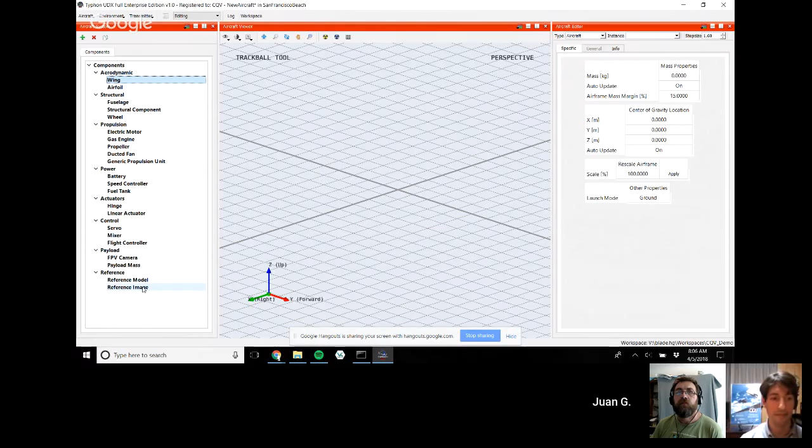So let's see how you use this interface to create a UAV design. The idea is you have a number of parametric components you can combine. For example, you have wings, airfoils, wheels, electric motors, and just a large number of components. And then you add them to your design as such.

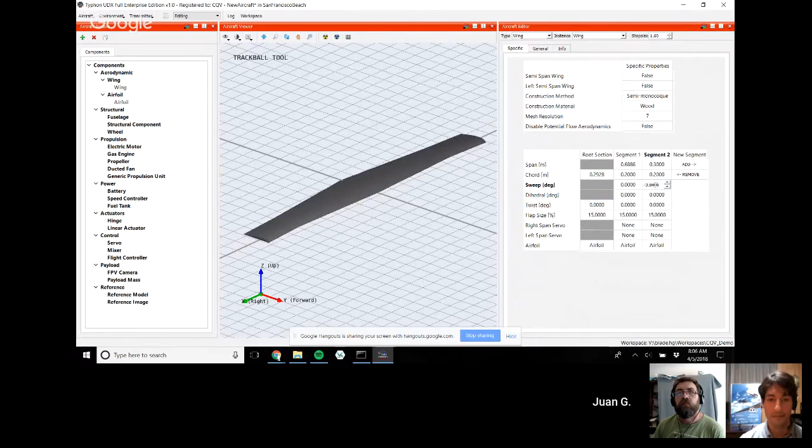Then you can go to the editor pane and edit the component. Each one is parametric, so in the editor pane you can see all the parameters that define the design for that component. For example, for the wing, you can change the chord and the span, and add multiple wing sections, allowing you to create quite complex wing designs. You can also select your airfoil from a large database of different airfoils.

I must admit, I'll stop you there. That's one thing I found hard, that little double set of arrows up in the top right. I didn't see those immediately, but I got there in the end. So you need to make that a bigger button, or I should read the manual, one or the other. Or if you make the pane wider, then it shows up right here.

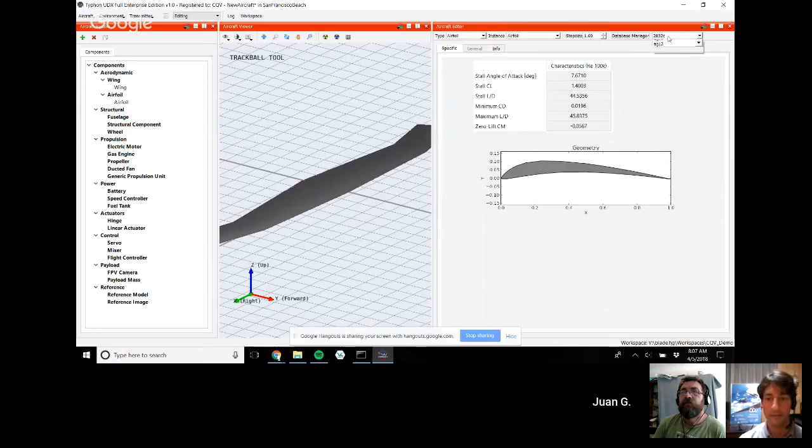Okay, yes, these buttons up here are the database manager, because each component has a database. For example, for the airfoils, you can see all the available airfoils and just select one from there. Let's also add, for example, a brushless motor here, and I'm going to move it around. When you go to edit that motor, you see the parameters that define it, and you also have a database. In this case, we include the T-Motor brand motors.

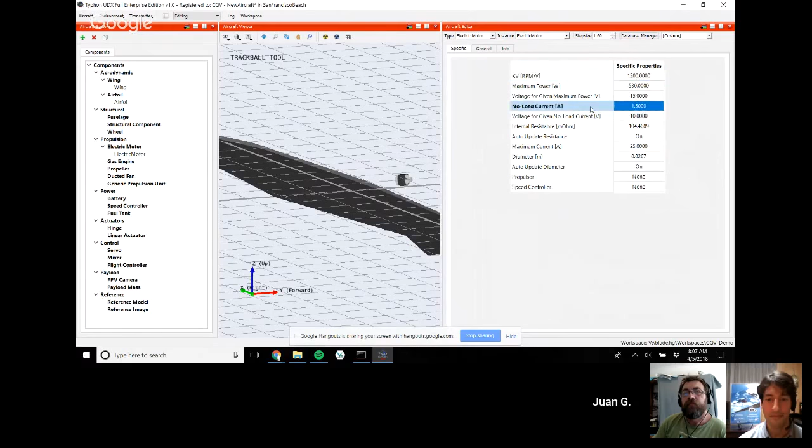I hadn't seen that, I was entering that in manually. I'll move the panes across. Yeah, it's useful because you can either enter manually the parameters from the manufacturer, the KV and no load current and all of that, or you can just select one from the database.

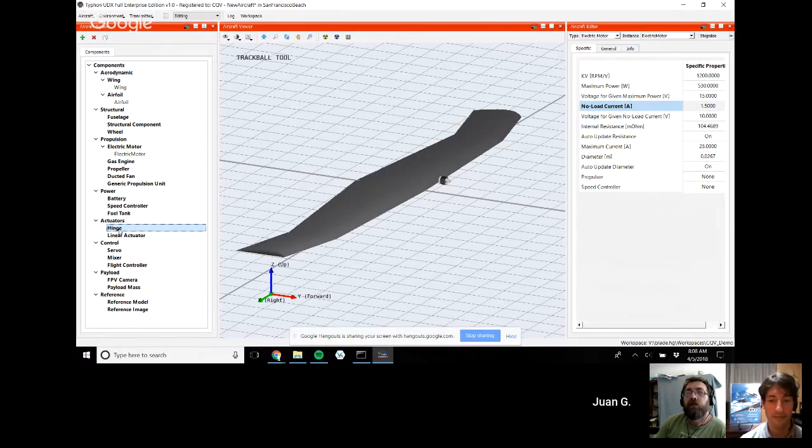The idea is you can combine all of these components and create pretty much any UAV design. One of the components is a hinge, which allows you to tilt, for example, tilt motors for thrust vectoring, create a tilt wing or anything like that. That was exactly one of the questions we've already had, whether you could use articulated motors. Yes, you have hinges to rotate, and you also have linear actuators, so you can even move components linearly back and forth using a servo.

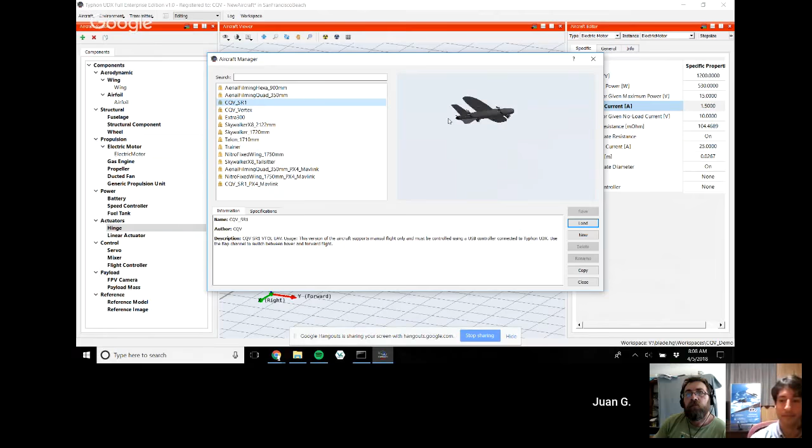The idea is that you can create very flexible UAV designs, and here are some of them. For VTOLs, this is one of our VTOL designs, which is fixed wing SLT, so it has separate motors for vertical takeoff and for flight. This is what we call the Vortex, which is the one I mentioned before, and that's the one you had the model of in the background.

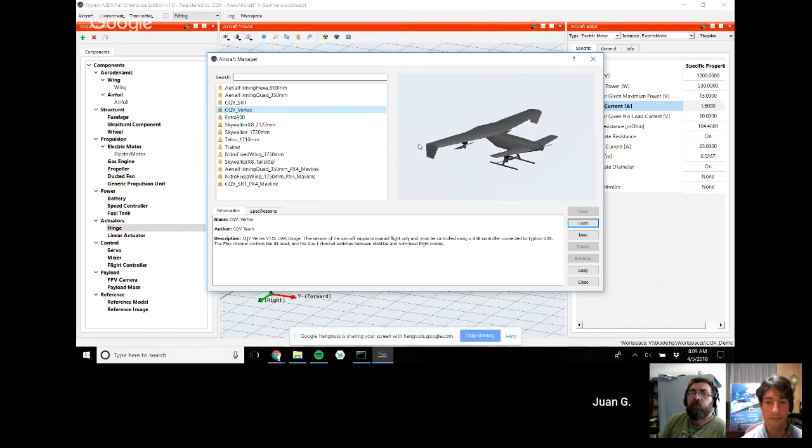Is that swivel motors on that then? Yes, each motor is on a hinge, so it can tilt independently. It's a tilt rotor design. That one's gone a little bit more then, it's gone from design to real life. That's not just a thing in software. Yes, this is one where we created the software at the same time as we created this design, based on our needs in making this actual VTOL.

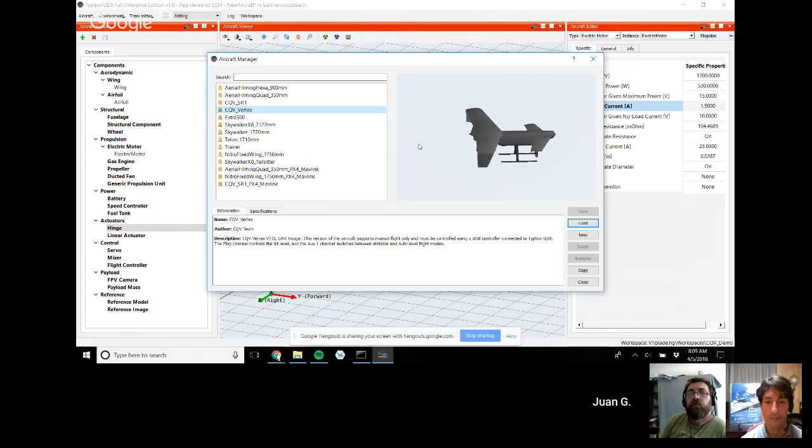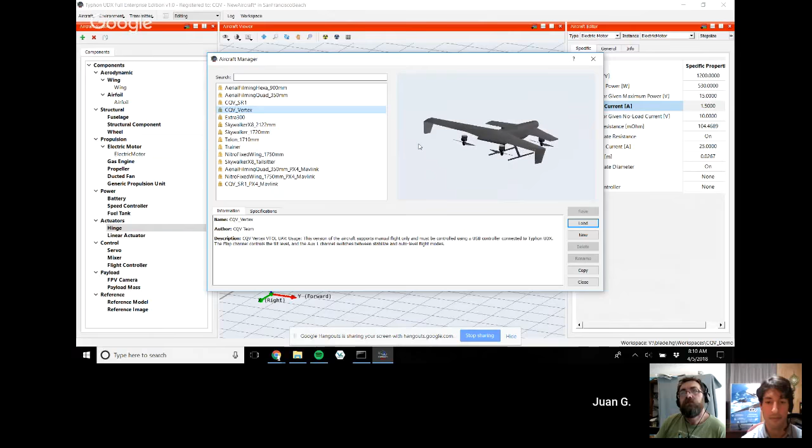I'm going to interrupt your walkthrough a little bit, but why did you choose a canard design for that? There's not many separate lift thrust canards out there. Yes, well, the main idea of this design was to put the motors in a pusher configuration, so that when you are hovering or in forward flight, the prop wash of the motors just doesn't hit the aircraft. And obviously, you want at least 3 or 4 motors to have hover stability, it's more stable to have 4 than to have 2.

So in this case, it can be a tandem design or a canard design. The idea is that you can place the motors, one motor on each wing, and it combines very well because it allows a stable design in forward flight and hover that also combines well with the placement of the motors in a pusher configuration.

Canards, if it's a standard aircraft, are always a nightmare to slow down because the thing doesn't want to stall, or it pitches the nose down. But you're going to get around that because you'll be landing in hovering mode. Sorry, I'm going a bit off topic, but it does strike me as a very interesting way of doing it, because of course you're taking less wing area around on the journey.

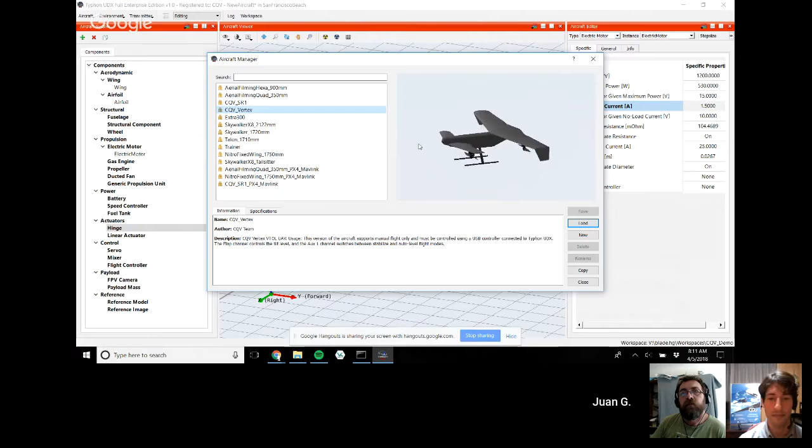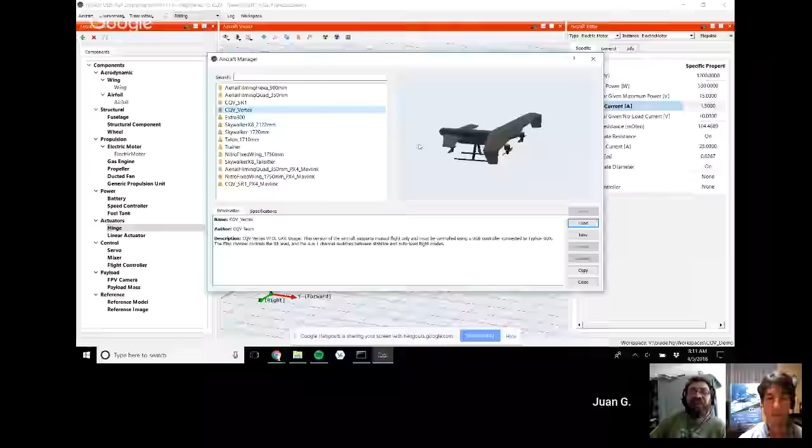In this case, you can even tilt the motors forward to slow down, and the canard configuration has some benefits for VTOLs. For example, if you're climbing vertically in hover flight or descending, it doesn't want to pitch down or up as strongly as a standard design. So it's more stable at very high angles of attack, which is useful for a VTOL aircraft. It has some other benefits, but we can discuss them another time.

Yes, sorry. Maybe keep walking us through. No problem, I'll be quiet now.

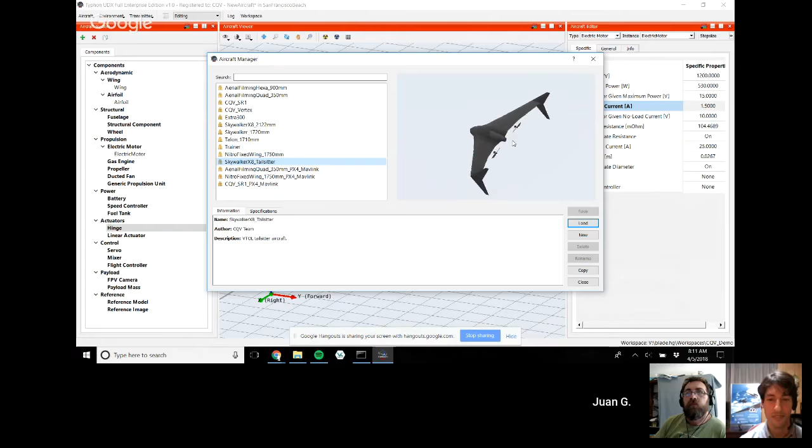This is another example. You can create fixed wing aircraft, including flying wings. This is a tailsitter design, another type of VTOL. But you can also make standard multicopters, and standard fixed wing aircraft, such as a standard trainer. You also have nitro engines or gasoline engines, so it's very flexible in the types of design you can create.

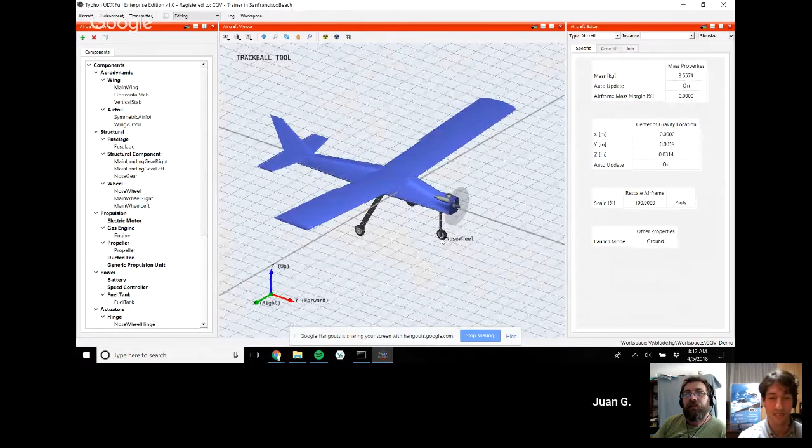You're not old enough to remember nitro engines. You don't know what a nitro engine is, you're too young. No, actually, the first one I flew was a nitro, so this design brings good memories. Yes, that's true for a lot of people.

Let me just load this trainer so we can move on and see. So once you create your design, the idea is that you can instantly simulate it.

Let me change this pane to simulation mode. I have a USB controller connected to my computer, and I can manually fly my design. The dynamics, the aerodynamics, the physics, everything updates in real time as you edit your design. So I can go in and edit any aspect of my design and see the effect on how it flies, on the performance, on the dynamics, and everything.

Why don't you drag the CG back to some ridiculous place and show it out of the way? Just show us, make it unflyable.

We have a question: the propellers for the tandem plane are directly below the wings, so do the wings block any airflow? Yes, that's true. What we do is shift the propellers back to limit that effect. Also, that effect is important only in hover, and what's important in VTOL is mostly to get good efficiency in forward flight. So it is an important effect in this design, but it has other benefits that outweigh that effect.

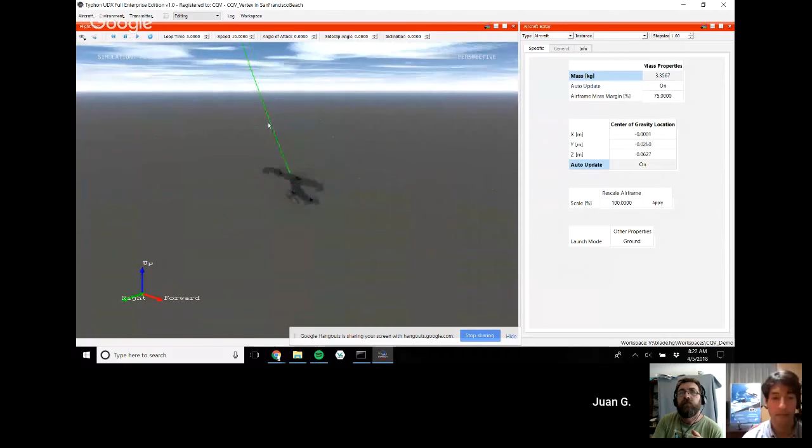So you have the simulation pane, but you also have the flight test pane. The idea of the flight test pane is that it's also a simulation, but there's just no ground, so there's no way of crashing your aircraft. If you're changing the design and testing different things, it's better to have it fly in an infinite space where you cannot crash it. That's basically the idea, that's the utility of the flight test.

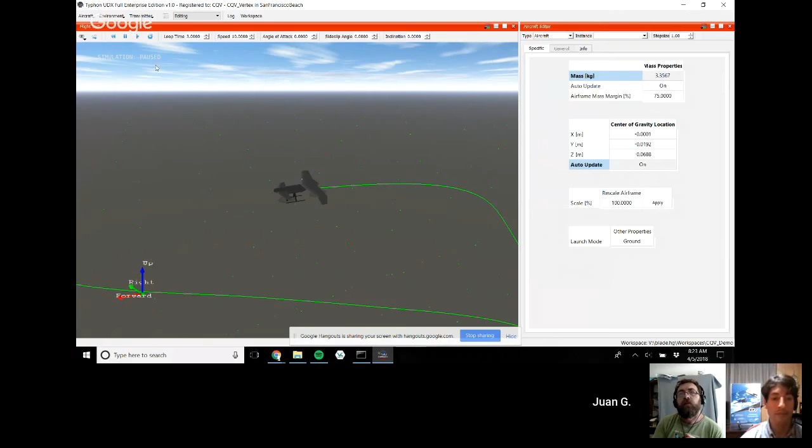And I'm showing here the vertex, I'm going to transition it to hover flight, and so now it's hovering. Have you done that based on the position of the stick, or on a switch? Oh, so you can set up your different USB transmitters and very easily configure them - you can assign channels to switches or to buttons. In this case I'm using a button, and when I click that button it's going to transition, but you can also use a knob if you have one on your transmitter.

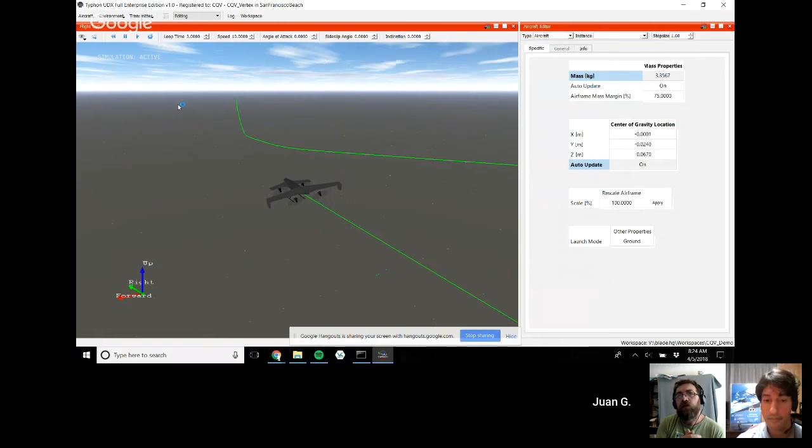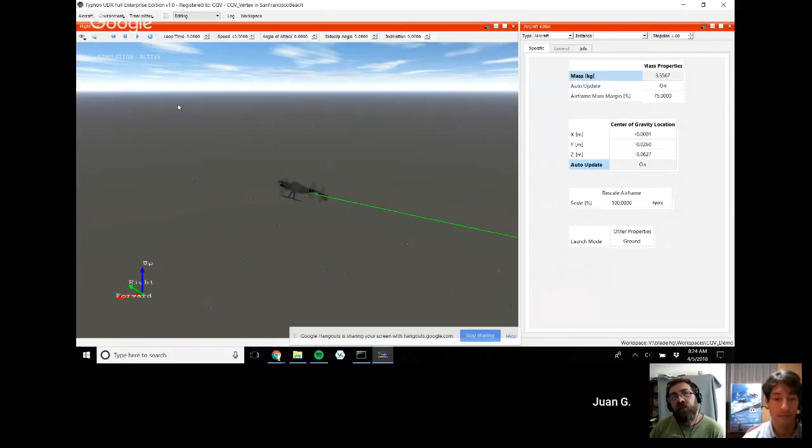So what we're going to see in this transition is, does the nose pitch up and the motors move to slow down, or is it different? In this case, just the motors tilt, and then you can manually pitch it up to slow it down. When you transition forward, the motor is still back and it starts moving forward, and it has an auto level feature, so it maintains the aircraft level on pitch and roll as it transitions. Now look, yours is - as you rolled left, your nose went right. Your nose should be following that around a bit more. Well, I'm just flying it lazily right now, just as a demonstration.

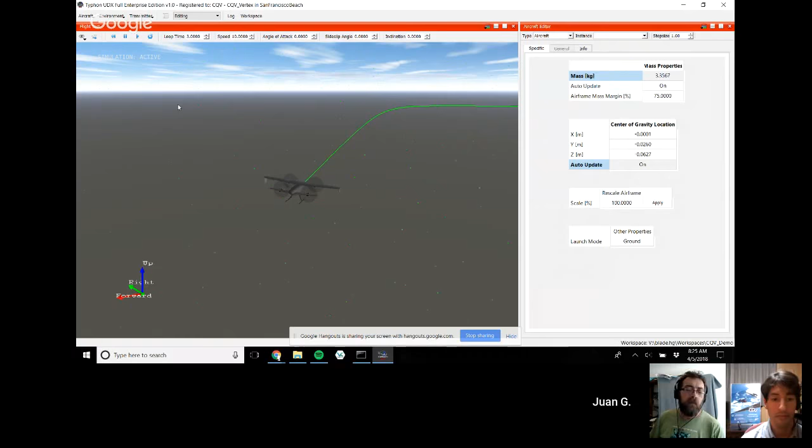Also, I'm going to talk about this later, but there's also the software side, the controls side of the software. For example, obviously an aircraft like this or a multicopter needs some flight control code to stabilize and control the aircraft. The way Typhoon handles this is that you can add a flight controller component to your aircraft, and when you add that, you get a script, a code script created on your computer, where you can write the flight control code that controls your aircraft. Or the second option is you can connect it to the actual flight control code, be it PX4 or ArduPilot, interface it to the actual code and have the actual code fly your aircraft.

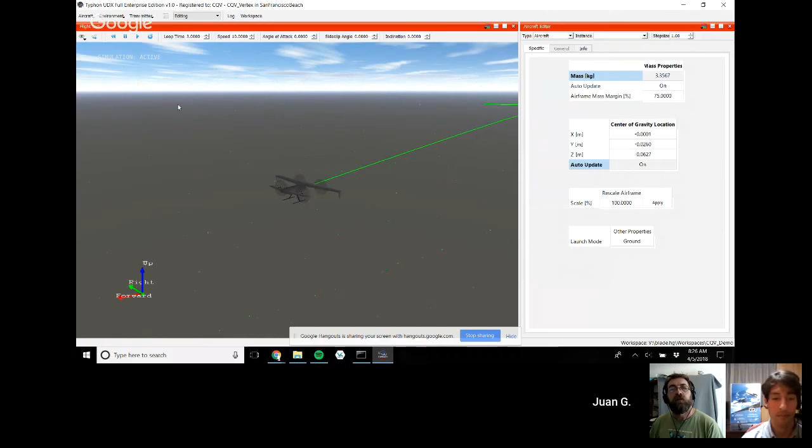So yes, because you need hardware in the loop. How do you connect software in the loop? So hardware and software in the loop is basically the same - one of the scripts you have connects, made specially for example for the PX4 or for the ArduPilot. So you put the flight controller component on the aircraft, you select in the editor pane from the database, for example the PX4 flight controller, and then it will automatically be set up for interfacing with the PX4. That's basically how you do it. Yeah, I tried doing that with hardware in the loop, I was sort of going along, but I failed.

I'd love to. In the comments, CG features are pretty cool, especially the fuel flow simulations. That's where I face the most difficulties when building new frames or adding lots of electronics to convert a frame to VTOL.

No, you really can. Honestly, I don't work for them, honest. But you can move everything around and have it as you want it to be. I was pretty impressed.

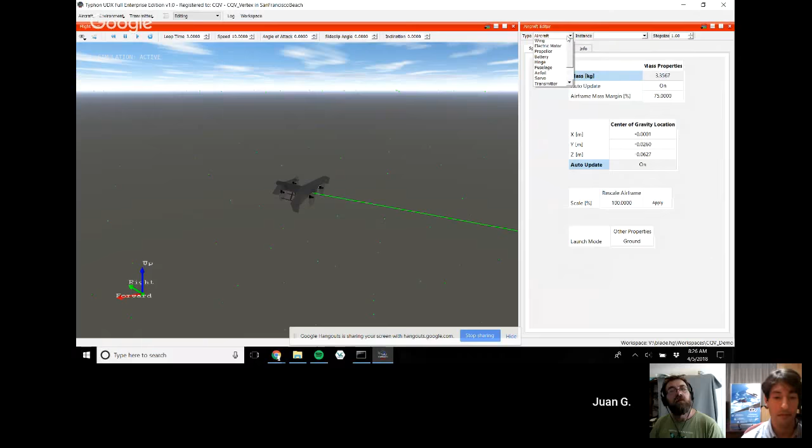So that's just so that pain really is so you don't crash while you're testing it. Can you modify while it's flying like that then? Well, anything really, let's see.

I don't know, the wing. Okay, let's move it. Let's move the leading wing forward. Or I don't know, let's increase the span of the forward wing.

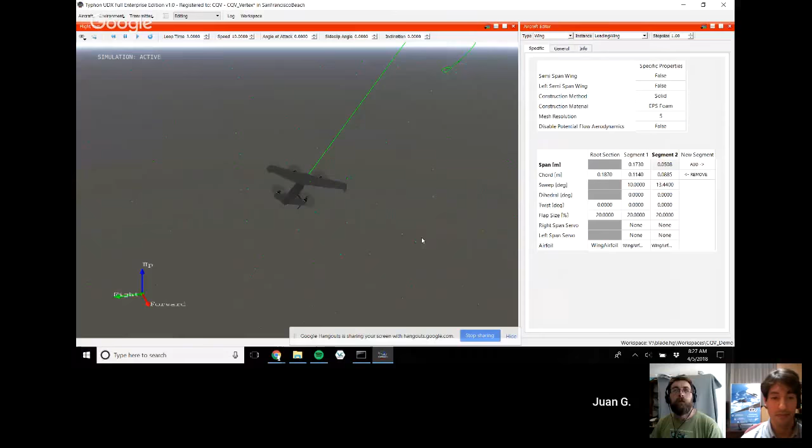So I made it bigger and it started pitching up because it has more lift on the front. So let me make it even bigger and it's pitching up even more. Or let me make it very small and see what happens. So I made it quite small and now it's pitching down, but it's still kind of flying.

So you can change anything: the airfoils, the locations, the propellers, the type of motor, basically anything. Okay, so that's crackerjack, we've probably spent enough time on that.

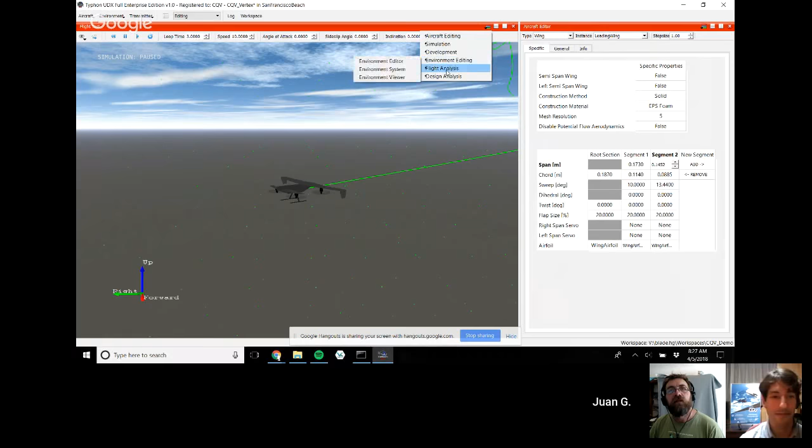The wind tunnel, show me the wind tunnel. Okay, let's go into the wind tunnel pane here.

This one basically showcases the aerodynamic model we're using, and the aerodynamic model is such that it actually predicts the flow of air around the aircraft based on your wing design. So this red line here is a streamline.

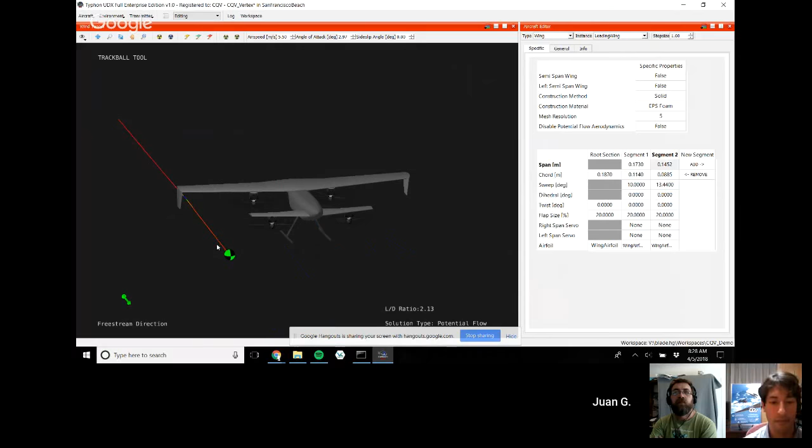It is the path that the air would follow around your aircraft. And as I move around, you can see how it interacts with the wing, or here with the flow of the propellers is being pushed down. And even as you move the control surfaces, you can see it's deflecting the wind upwards.

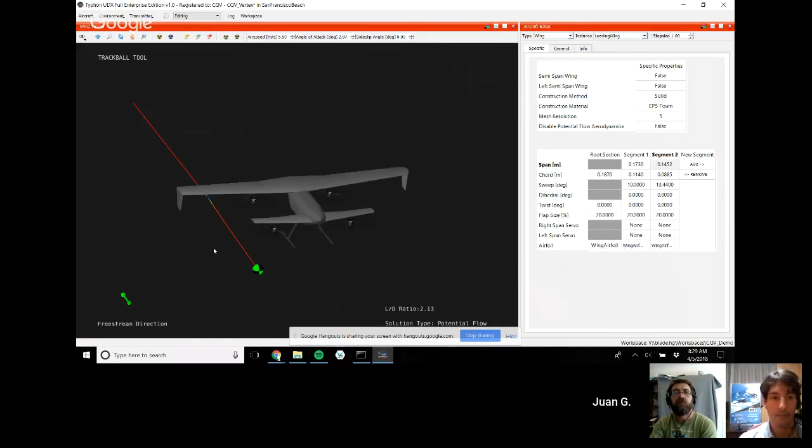So basically, this type of aerodynamic model we use is quite unique. It's basically the best you can get if you want it to run in real time. We haven't seen it being used that way in other software. You usually run it offline, and then you see the results. In our case, we're running it in real time.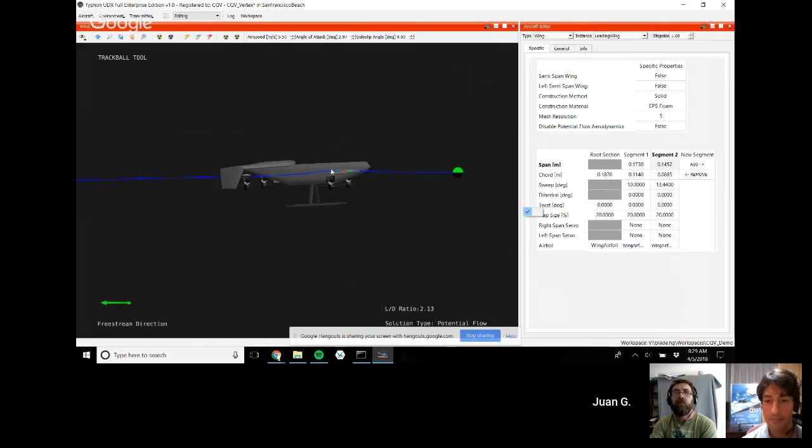So that way you can get a very high quality aerodynamic prediction in real time as you edit your design. And that's really what this pane allows you to do. But the utility of this pane is really that, for example, on a design like this, you can have interactions between the two wings. And here you can see how the downwash of this wing pushes the air down a little bit.

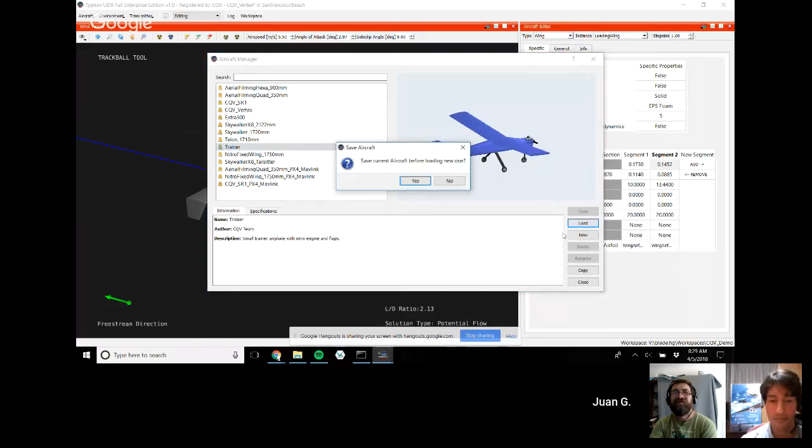And that will affect how the rear wing behaves. So this way you can see interactions between wings, interactions between the wing and the tail of the aircraft. Let me show an example here, load the trainer again.

Because this trainer has flaps, has ailerons, but also flaps. As an example, let me increase the airspeed. And I'm going to plot here these force vectors on the aircraft. This is how the air is pushing on the aircraft.

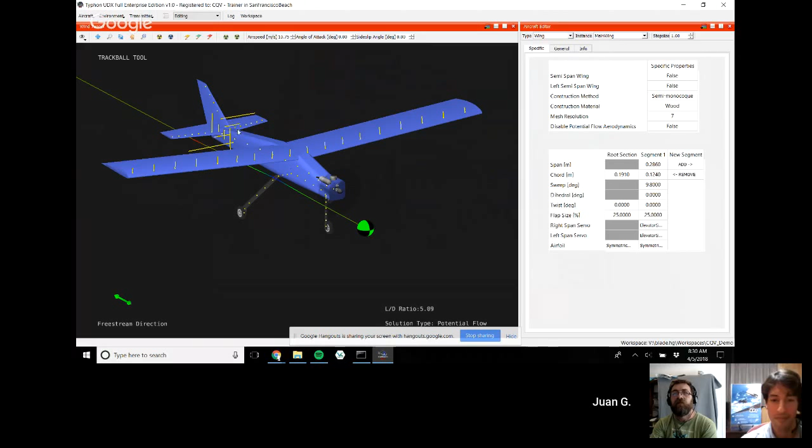And on the tail, it looks like this because the propeller is creating a slipstream that goes around. It has some vorticity to it, so it pushes the tail in this direction.

But what I wanted to show you is that when I put the flaps down, you can see first that the lift increases on the wing, but you can also see if you watch closely that the tail actually pushes down more. So flaps down, flaps up, you can see that this force vector change.

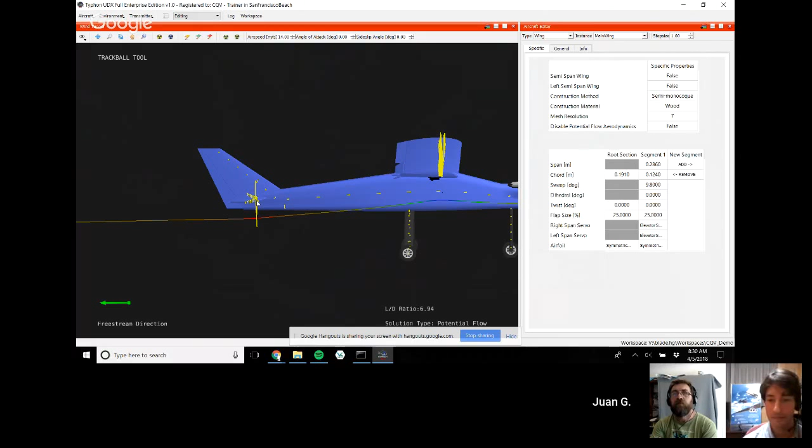So that's basically because when you put the flaps down, it's pushing the air down more, and that is affecting the tail, and that is what makes the aircraft climb up, want to pitch up when you put the flaps down. So you can see that type of thing using the wind tunnel pane.

A lot of the features of this are beyond my pay grade. Really, I was just pleased to be able to have something that I've made in real life and start simulating and fiddle around with it.

Well, I'll let you continue. I'm not sure what order you want to do things in. I don't want to drive this too much. Okay.

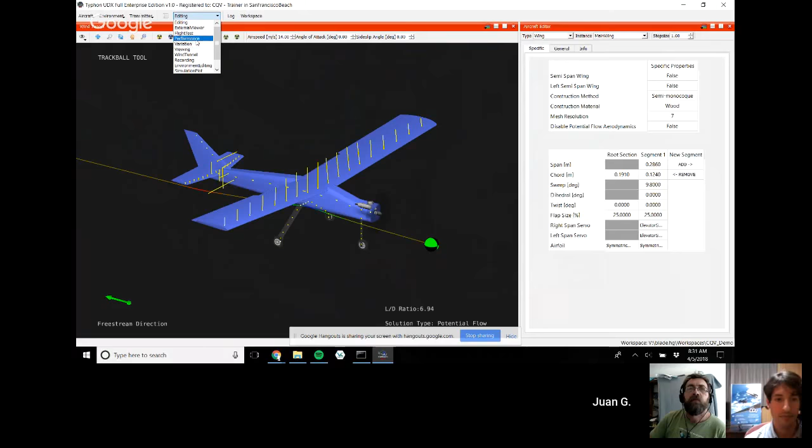Another important aspect of the software is the performance prediction aspect. Let me open the performance layout. You can also save layouts of your panes, so you configure your panes how you want, and then save it as a layout, and you can open that layout later.

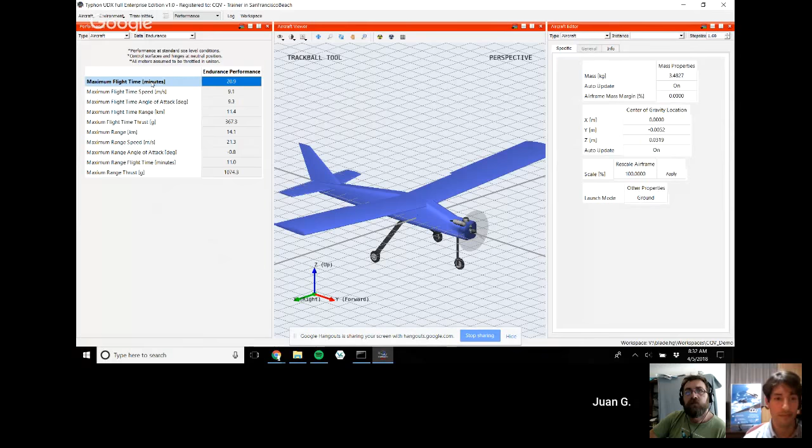I just opened a layout with the performance pane here. This pane is able to give you predictions of the performance of your aircraft as you edit it, so you don't actually need to fly it to see the maximum speed or how long it flies. You get those predictions right here, and they help you set up your autopilot, giving you starting figures to play with.

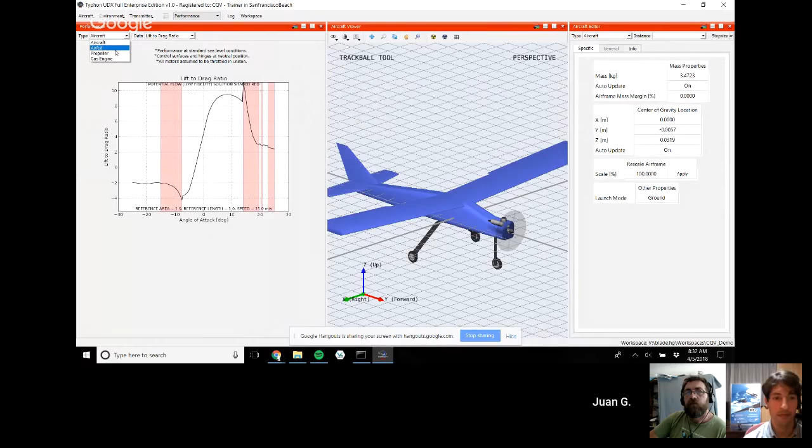For example, you can go into endurance predictions and get the maximum flight time of this aircraft, the maximum range, the speed at which you get maximum range. You can get all sorts of predictions, the payload the aircraft can carry, and you can see the aerodynamic coefficient curves that the software is predicting.

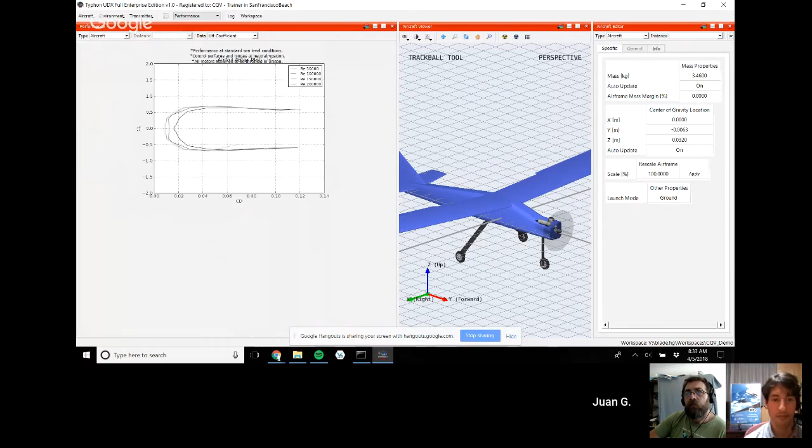You can also see performance predictions of specific components. You can go to your propeller and see the thrust coefficient and power coefficient. You can see the torque and power curves of your engine. You can see the dynamics of your airfoils, the airfoil polars, and get all sorts of predictions here.

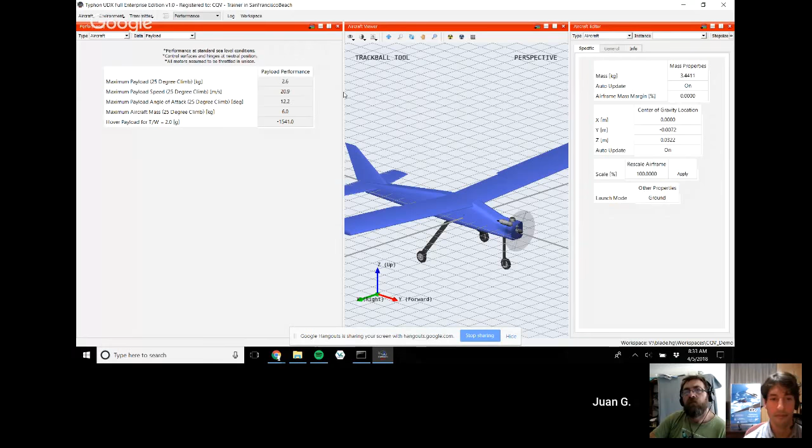The idea is that this can help you quickly optimize your design. When designing UAVs, usually you have conflicting design goals. You want to fly the maximum time possible, but you don't want the aircraft to be too big, and you don't want the wing to be too big. These conflicting design requirements make it difficult to design. But if you have a tool like this, where you make a change and instantly see the effect on multiple aspects of performance, it really accelerates the process of optimizing your overall design.

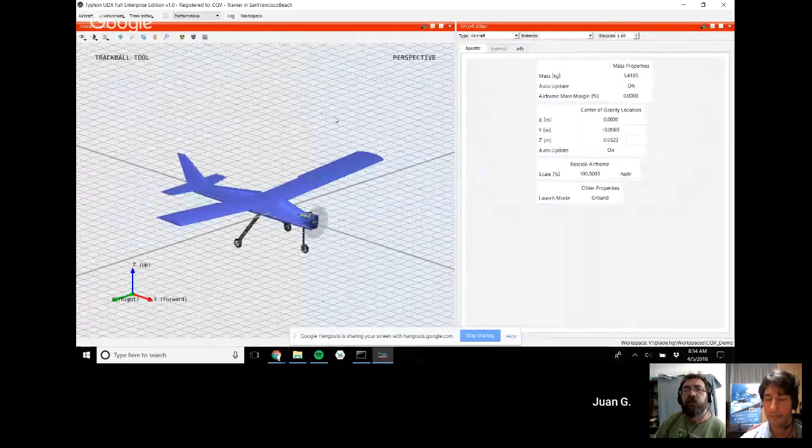You can see what the servos are doing, you can see what the motor's doing in graph form running along as the aircraft is flying. Yes, thank you for mentioning that, that's an important one. Let me go back to the simulation with this trainer.

One of the panes is called the state pane. I'm going to open it here on the right, and here you can see the state of the entire aircraft or of individual components as it flies. For example, here I can see the location of the aircraft, the velocity, the angle of attack, the lift force, but you can also go to specific components.

Let's look at the propeller, and you can see the RPM and the thrust in real time as you fly it. You can go to the gas engine and see the consumption. Basically, you can observe all the state of the aircraft and really look at what's going on. You can even see how the servos are moving around, and you can manually activate the flight plotter.

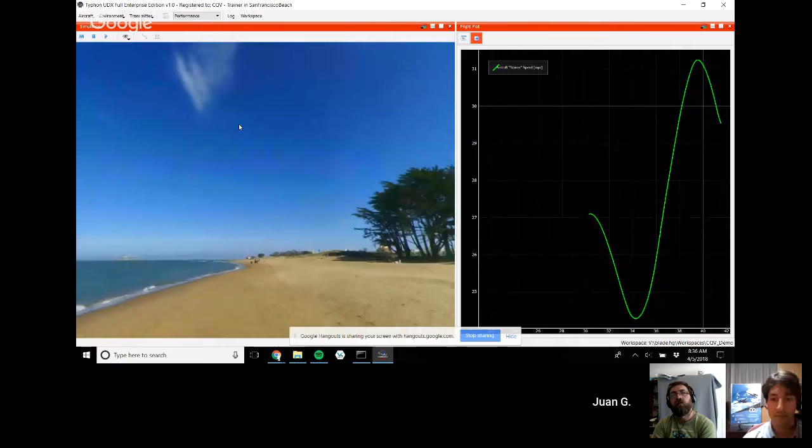Another way to visualize the state is the plotting pane. You can see it on a graph or a table like this, but you can also create a plot of that data. You go here, you have all the state parameters of the aircraft, and then you can select what you'd like to plot. Let's plot the speed, and as I fly it, you see it's creating a plot of the speed of the aircraft. You can plot pitch, roll, basically any state parameter of the aircraft, and see it in real time.

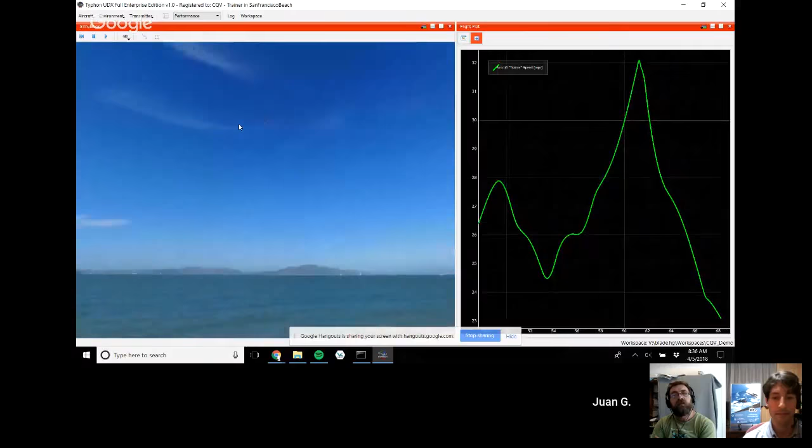Do you have the ability to show us it flying a mission connected to... I've forgotten the name of that mission planning software. Have you got that set up on your current machine? I don't have it set up right here, right now. Okay, I should have said that. Sorry, but you can, can't you?

You can run a simulated mission with your aircraft. Yes, you can do exactly what I'm doing right now, but have the flight controller fly the aircraft, and you can see all these plots. You can see everything that I've shown, as the flight controller is flying the aircraft.

And you can then connect to the ground control software, station software, to use them in combination with the flight controller, the GCS, and Typhon. Once you've designed your aircraft and you've got a mission - funny enough, I haven't thought much about needing a heavy lift multi-rotor, but yesterday I did, because I've got to move some logs up a big slope, and I was thinking I wish I had a multi-rotor that could lift 50 kilos of logs. So if that were my mission, I could set that up and see how that would work, or a delivery or something, and see if my aircraft really would meet my design requirements before I start paying money out and buying stuff.

Yes, that's the idea. You can plan missions, you can rehearse them, you can see. You can also change the environmental conditions - you can add turbulence, wind, and test your mission in different conditions.

There's also this other feature I wanted to mention, the recording pane. This allows you to record a simulation and play it back. The other neat feature is that you can also load flight logs from actual flights. So we made a flight with one of our VTOLs, and I just clicked load here and loaded that flight log, and I click play, and this is actually playing back that flight we did. It's flying like this because the actual aircraft is a VTOL, so it's taking off vertically, and you can see all the plots, all the state. You can use this to explore the mission and analyze your flights and see what's going on. So this is playing back based on the recording of the actual mission.